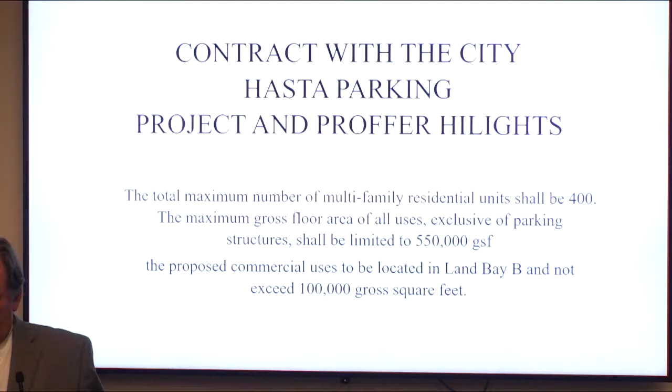Again, this is the contract with the city. We have, in our proposal, 400 apartments, mid to high rise, and a total of 550,000 square feet, which would include a commercial building in what we call the third phase, which is next to Manassas Drive.

As a part of this application, we're going to rebuild the streetscape along Manassas Drive all the way to the railroad. It's going to parallel in design what you have on the other side. It's the streetscape the city has elected to have, and we're going to do that. We're going to take all the power underground, take down old light poles and put in new ones that conform with your design schemes along Manassas Drive. We're going down to the railroad, but that's as far as we can go—that's all the property we have.

We're also going to rebuild a portion of Connor Drive. Currently it's substandard—not a conforming design to VDOT standards. We're going to build a half section of it on our side as a fully conforming VDOT design with sidewalk, et cetera.

We're going to rebuild the... what's the name of the street, Jeremy? No, rebuild Broad Alley—thank you. I knew I brought you for a reason. Broad Alley, I know it's being changed by name to Liberty or something.

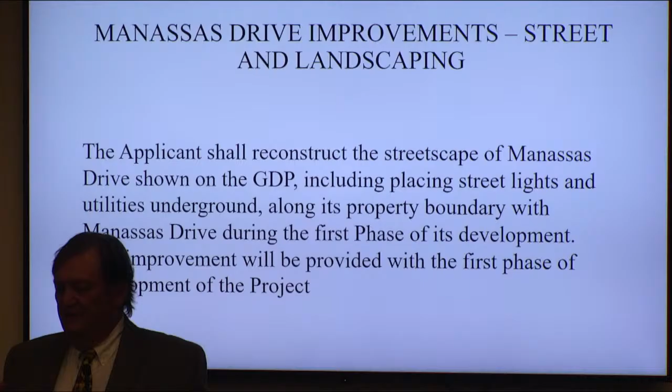So we're going to rebuild that so it's a fully functional two-directional drive into our site, and can spread out ultimately to Connor Drive to Euclid. The redesign of that will require a reconfiguration of the intersection with Manassas Drive. It's currently well below standard, and we're going to try to make it way more predictable and safer, hopefully.

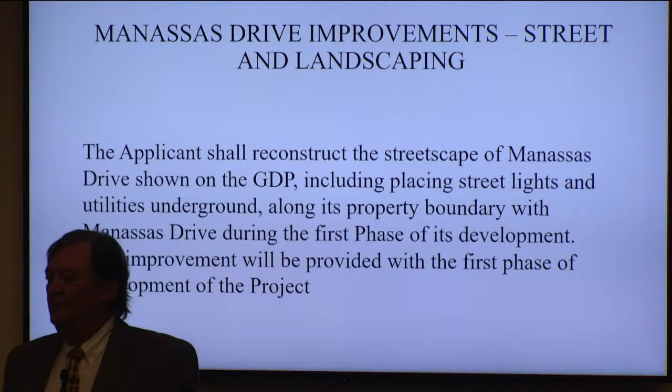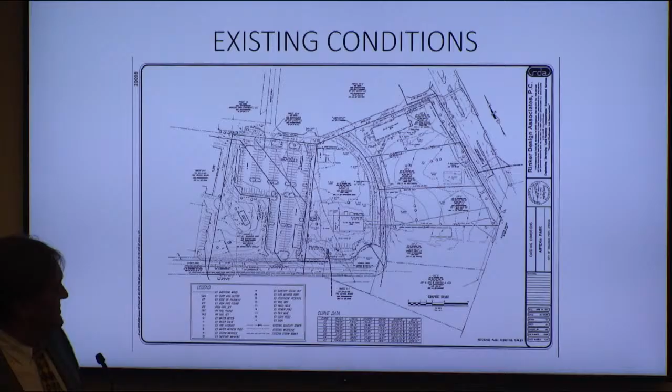We have submitted a generalized development plan. Let me point over here. The existing property has been industrial here, and here's that parking lot we're talking about. There's an old historical—semi-historical—house that's still there right here, and you'll see this come into play with some of our sketches.

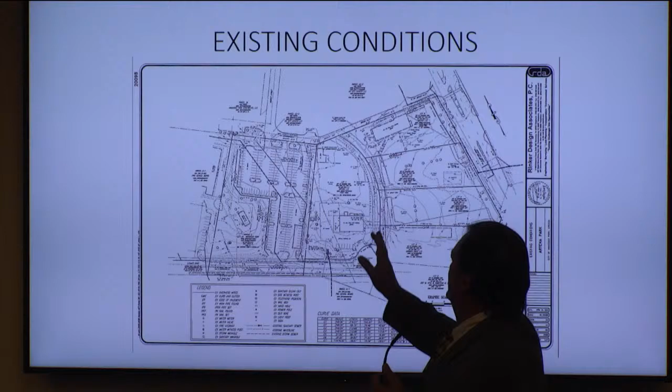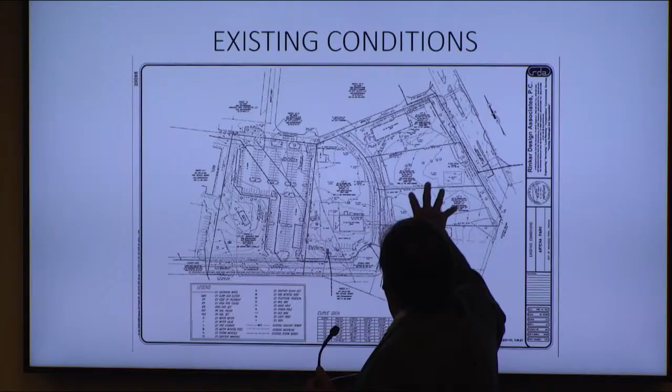Currently, Connor Drive comes here, and there's an easement that runs through here. It doesn't do anything, there's no road, it's just a driveway. So there are industrial buildings that are all going to be removed, obviously, as a part of this project.

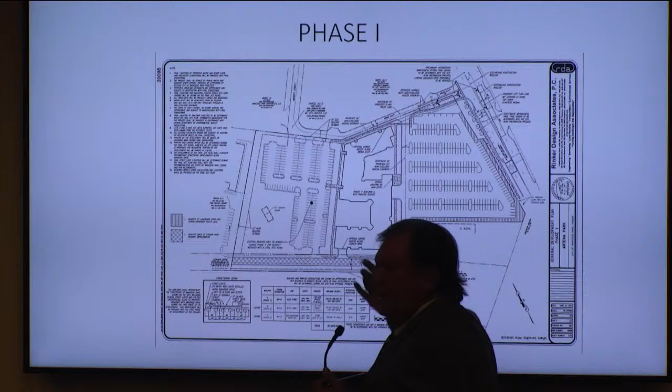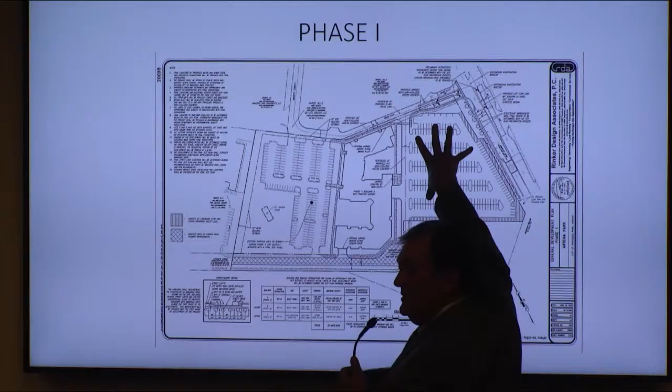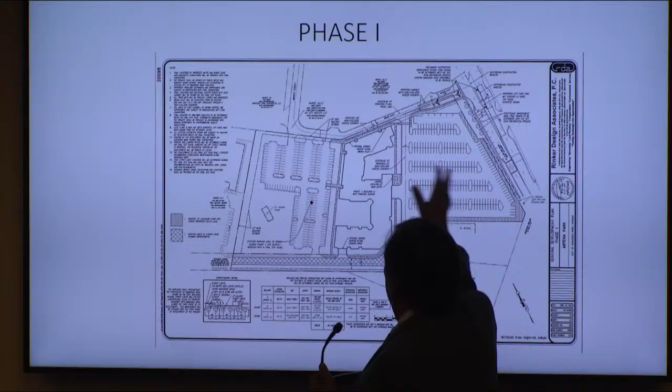This is what we foresee as being our first phase of development. It would be somewhere between 200 and 240 apartment units here, with some structured parking underneath. It's not a full podium building, and you'll see some illustratives that show you a little better. This is where the 150 spaces would go under the deal with the city for them. It's essentially a malleable definition of where these parking spaces will be, because as we develop the sites we're going to have to do some swapping, but they will always have 150 next to them. That's why the parking structure may come into play.

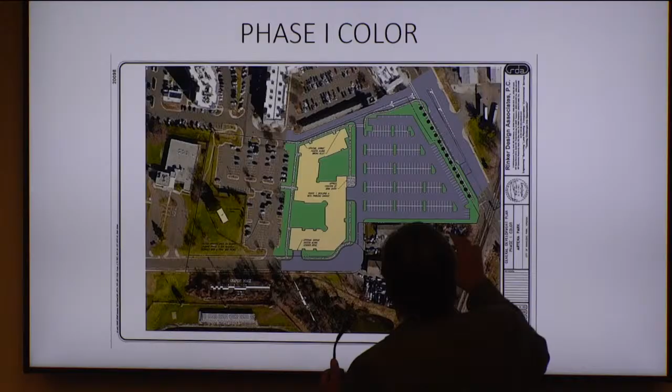This is, again, a little color—shows some of the perimeter with Manassas Drive. We've been asked to treat the area next to these ugly industrial uses. We are going to put a heavy landscaped area in there and try to dissimulate the appearance of those uses. We don't like them either—we don't want an 8-story tenant having to look down on that stuff.

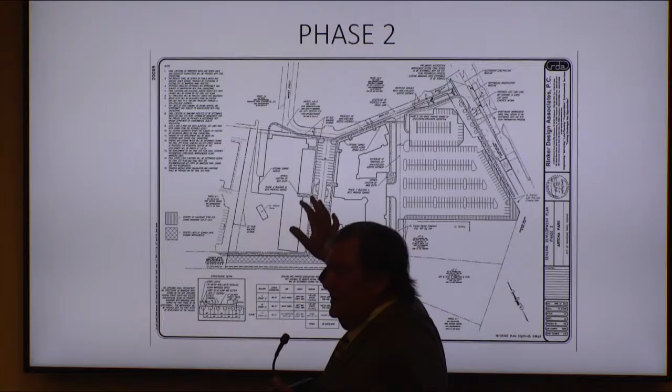This is the project with phase 2. Again, this is a generalized development plan—it's not in final form yet. The buildings have had some design elements completed, but we're reserving the right to do some tweaking. Both of these buildings could have 200 units each, both fully parked with structure parking underneath.

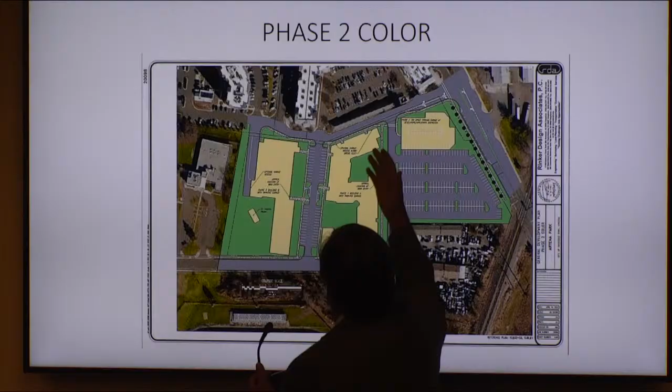The prettier picture is coming up. Okay, this shows you the two phases with a parking structure potentially there. It's our option to provide it—if we build enough structure parking under the buildings, it may not be necessary to build the parking structure here. It's all, obviously, going to be an evolution of site planning.

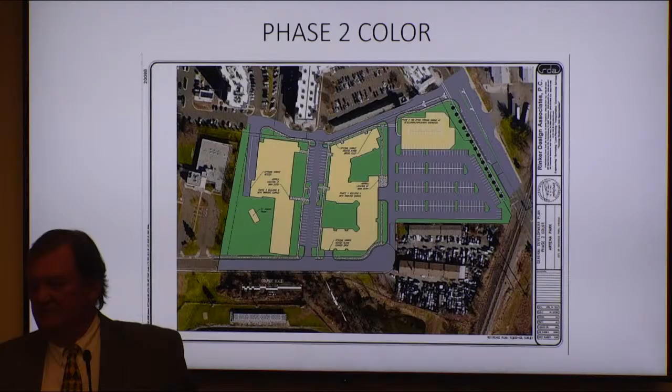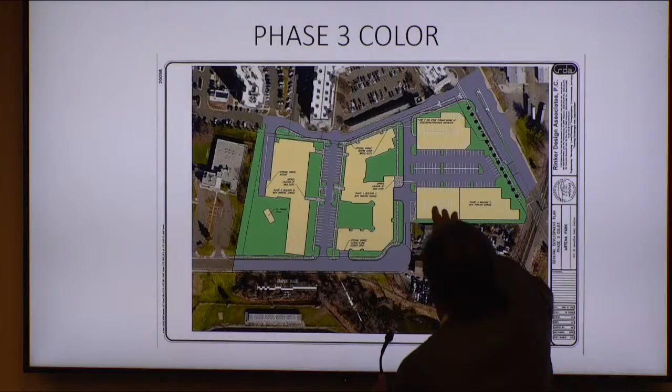Okay, this shows you the final stage, which would include some likely structure parking under a commercial building in this phase. So we would have surface parking feeding the commercial building, with some structure parking in case we go up with it to 4 stories or so. It hasn't been designed yet.

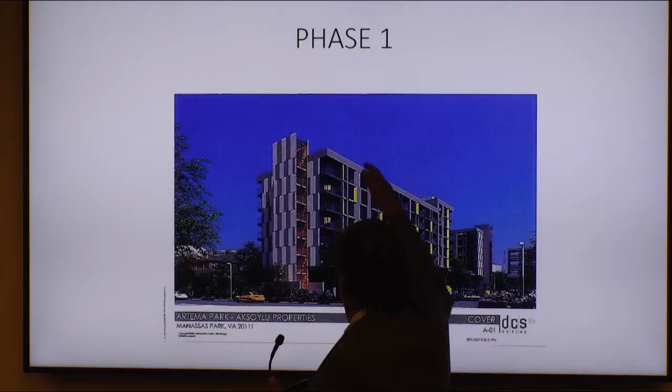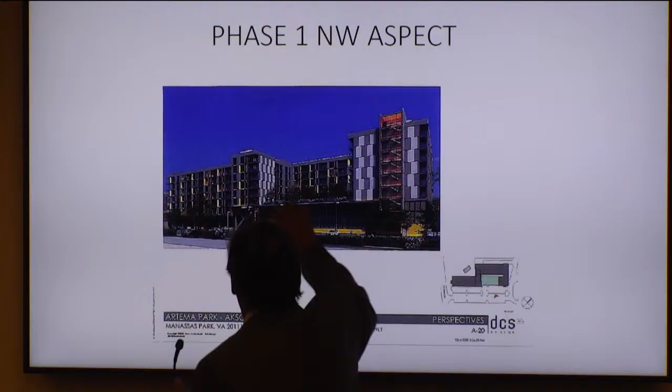This is phase 1. Again, this is showing a 7-story building with an entry notch here, and this back area is structured parking as currently designed. This gives you a view of the same building from the northwest. Once again, this whole area is designed to be structured parking, and most of it enters off of Connor in the current design.

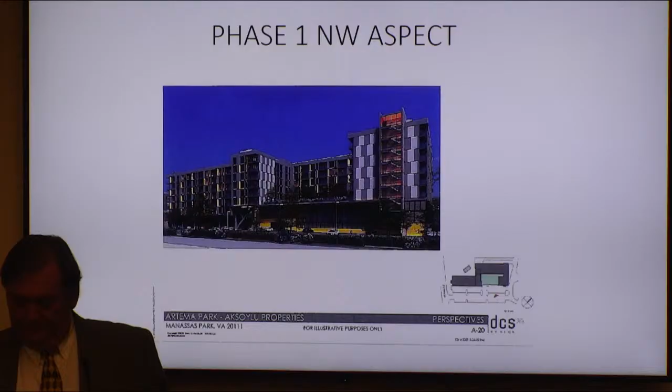This is phase 2, and this concept involves the old house acting maybe as a clubhouse or pool house for the pool that would be notched next to the building. Connor Drive is right here.

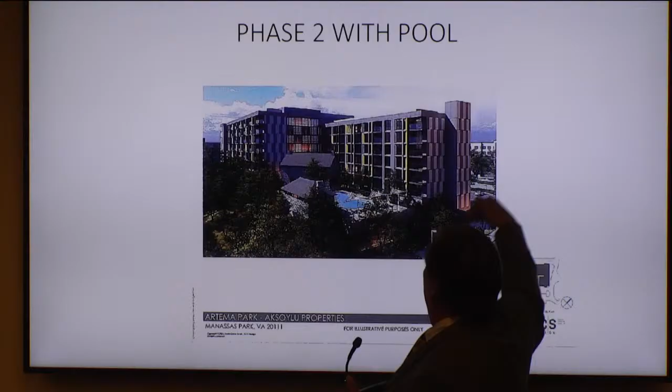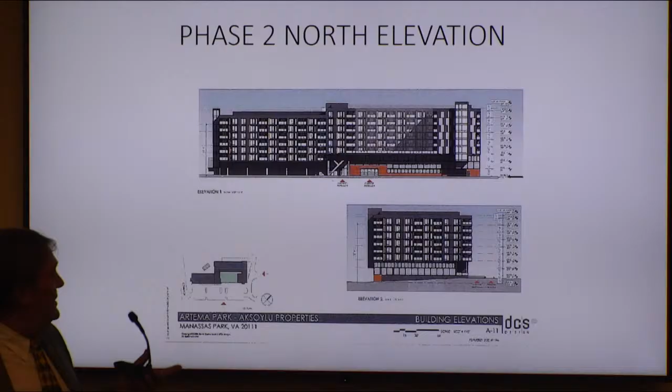This is an elevation from the north side of that same building, and you can see there's an element of structure parking that comes in here as well as here.

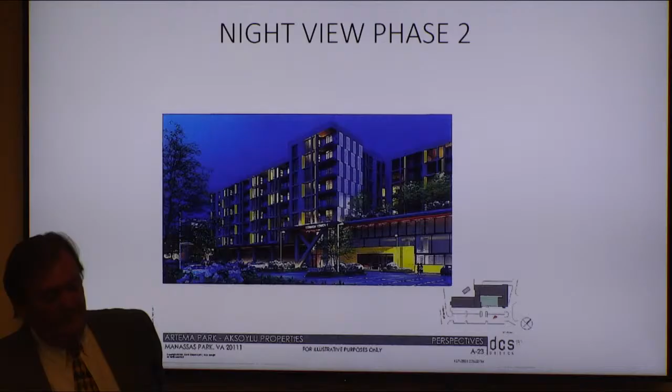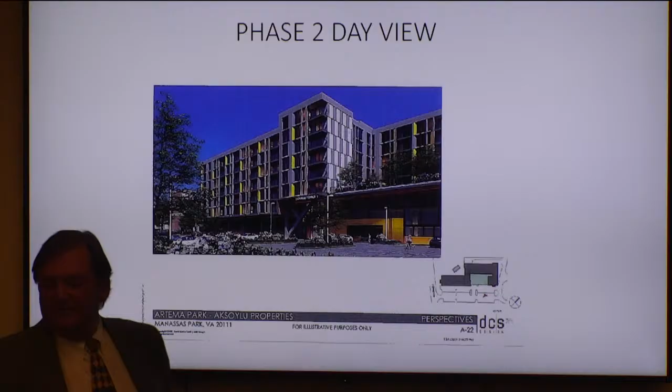Some pretty night views — no use wasting the architect's work. Again, same thing, looking at it from the north. This is looking at it from Connor Drive, from the ugly uses.

And an elevation of phase 2 that shows the existing house, Connor House, and how that would work out in terms of elevations, et cetera. There's a lot of vertical going on over there.

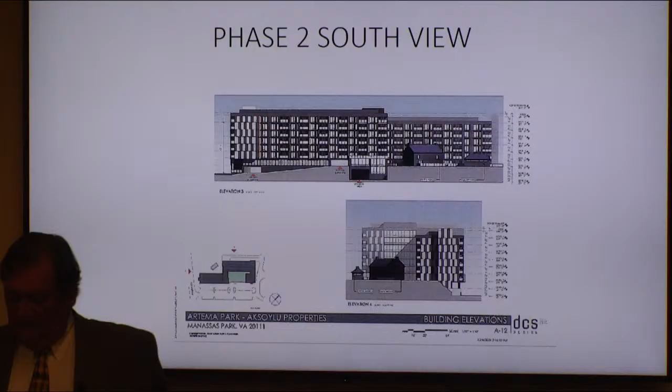We've asked for some modifications, and basically they allow us to be efficient in our site planning. We don't want to have to deal with any minimum lot sizes, not that we would have any small lots. Lot widths and setbacks are in accordance with the ordinances.

Lot coverage not exceeding 90%. We're going to be well below that. For the minimum height for all structures, my engineer noted we have a typo here — it's actually 20 feet what we're looking for, because that commercial building might only be 20 feet. And then a reduction in parking for the residential uses to 1.3 per unit.

Now, these buildings will have all facilities regarding biking and trailing and all that kind of stuff. They're going to have all the parking inside the buildings. That's fully committed, and we really want it.

Our building next door, as you know, is an existing building. That one was our test for parking efficiency in that area, and we had results from 1.28 per unit to 1.12 per unit, depending on days. So we said, okay, we'll go with 1.3, and we'll be fully parked, well parked.

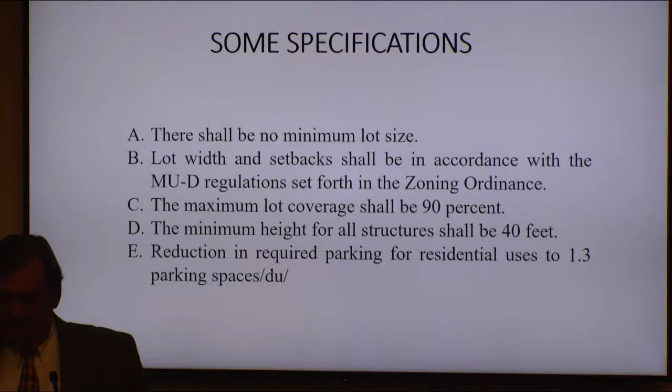That's it. That's my presentation, and I'm happy to answer any questions.

Commissioners, have any questions? Commissioner Mensing: Will the Connor House be accessible to the public, or will it just be for the residents?

Yes. Right now, what we're expecting is we're going to have to totally refurbish that Connor House to accomplish occupancy in it. It's going to be quite a job, a seven-figure kind of job. So how we reconfigure it, for sure it's going to be habitable, and to the extent that management desires to have it available on occasion for weddings and that kind of stuff, it'll be strongly considered, because we're not going to spend $1 million refurbishing that thing without having a reasonable return on that investment.

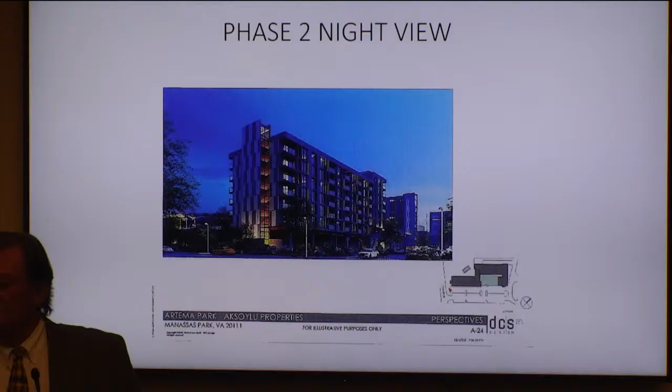Okay, thank you. Just to add, if it's the will of the governing body, we can keep some of the historical sign information on the public right-of-way pieces, just to highlight so people can at least see that and know what that structure is — the stones coming from the city, and that it's the oldest structure in the city.

Yeah, that would be great if it could just be viewed. It doesn't need to be entered. Exactly, of course. Thank you.

Commissioner Collier? Maybe not? I can ask questions if you want to. No, you're okay? I'm going to do it. It's just that — your microphone, I'm sorry.

I have really mixed feelings on the use of the Connor House. That is a Civil War historical building, not to be used as a pool house. I'm sorry, people, I'm going to speak how I feel here tonight. That is a historical building. It's not to be desecrated in any way.

If I may — let me finish, please, because once I get started, it's hard to stop. That building has so much history. And if you go in there, your client — not you personally, it's not directed at you, sir.

If you go inside that building and refurbish it to modern day, I have a hard time with that. It needs to be kept as it is. If you're going to spend that $1 million, bring it back to its natural state completely.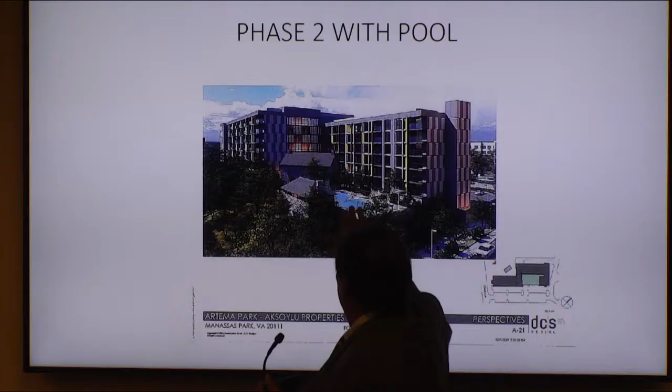If I may, to try to perhaps make you feel better about this. This design plan shows a pool house with a pool and the Connor House behind it, freestanding. The biggest issue we have with the Connor House, aside from habitability, from a design standpoint, is we have to put fire lanes around it, and that really constrains how we develop our site. So we're still working it. I know Mr. Aksoylu, who is our tenant, is in favor of keeping it. So you got that anyway.

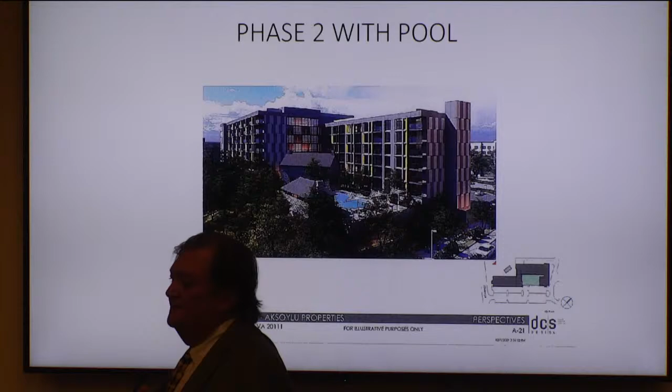I don't know. Thank you. You're welcome.

If I may, at this time, we received a written email with 3 comments in it. I understand that you were provided a copy of that. I'd just like to make sure it gets on the record and then afford you an opportunity to speak to comment number 3, if you wouldn't mind. This is from a Mr. Mark Scheffler, Manassas area resident, dated May 2nd, 2023.

Manassas Park Planning Commission, please consider the following comments to rezoning RZ number 22-03, Downtown Development Phase 4, Artena Park. Number 1, very supportive of the density near the VRE station downtown area. Number 2, very supportive of what appears to be the preservation of the Connor House. Number 3, one element missing from the project is what appears to be a lack of ground floor apartments or townhouses with private entrances opening directly to the street. The design appears to include a lot of blank space and parking podiums on the ground level, which does not promote a sense of community outside of the buildings.

The design should include the outward-facing concept that supports people walking past doors, stoops, porches, and more importantly, people. This makes the area safer by providing more eyes on the street. Ground floor units could be separate from the main building design and could provide other rental housing types. Please consider this feedback for a more urban concept and not a semi-urban design. And then he has a link to an article below that.

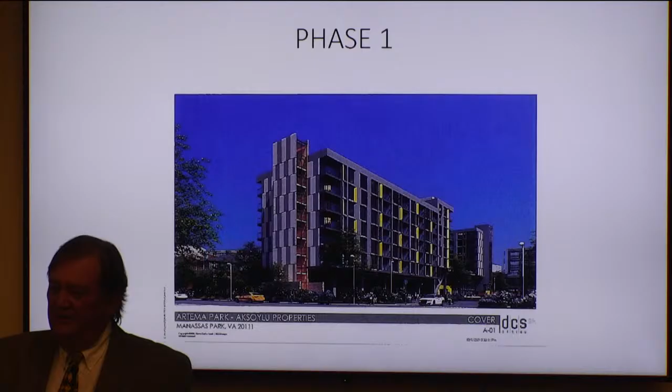One other item, in the proffer, clarifying that the existing NOVEC streetlights will be removed and all existing utilities will be placed underground. I understood you to say underground. Yes, and we showed all that in our GDP. Okay, it's all depicted and noted. Great, thank you. Other questions from commissioners? Okay, thank you very much. Thank you, Mr. Chairman.

Administrator Berry? Oh, don't let me walk away with this. Do you want it? Have luck with this. Great, okay. Oh, there we go, okay. All right, thank you, Chairman.

I am Michelle Berry, the zoning administrator for the City of Manassas Park. I'd just like to give you a brief presentation. Some of these images will be repetitive, so I'll go through those pretty quickly.

Which one did you use to move the arrow? What do you use now? Oh, is it? Have to close one. Probably close that one. That one. Oh, perfect. Okay, thank you, Laszlo.

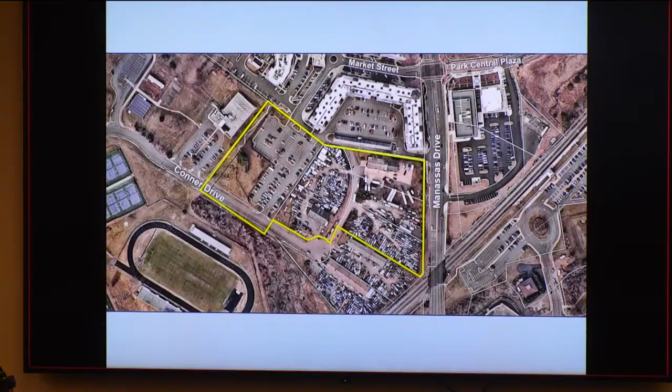Okay, let's move on. Here's the location of the property. I know the applicant described it, but here's just an aerial overview. It is bound by Manassas Drive and Conner Drive to the south. There are a lot of industrial properties currently in use, so I believe staff and the rest of the city are happy to see that use change. We are excited about that part of the application.

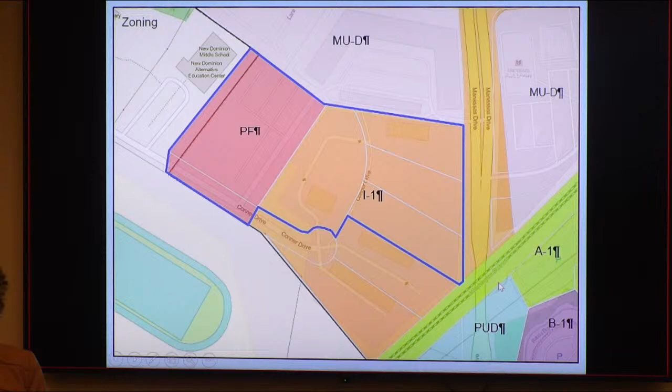Just from zoning, you can see that the property is zoned PF and I-1. The PF is the city-owned parcel that was discussed earlier, and everything else is industrial.

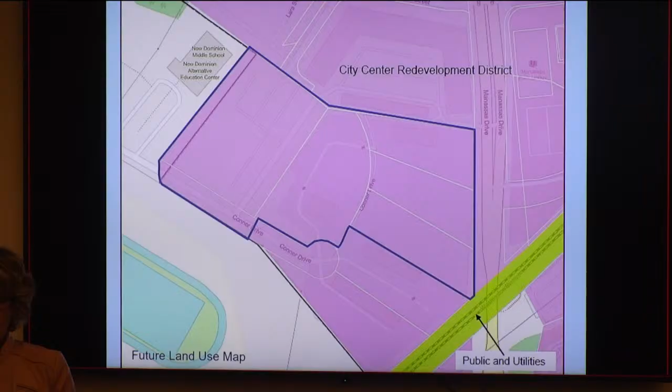So Phase One, as Mr. Montenegro described, is going to be the first apartment building, which will be in the middle of the site, along with 150 parking spaces. They are providing the requisite City Center Redevelopment streetscape. You'll see the parallel parking, the street trees, and can't see it too clearly, but there are light posts in between the trees.

I just wanted to focus on this area of the plan to show that they are doing improvements along Manassas Drive, making a left turn lane, and then converting Broad Alley into a two-way direction. It currently is one-way, only accessing Manassas Drive. So it will be through traffic there, with a dedicated right and left.

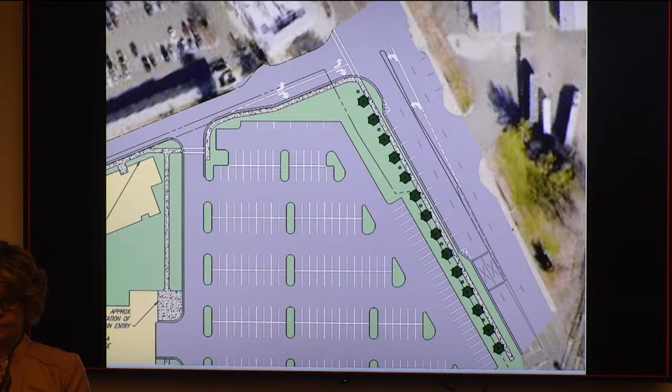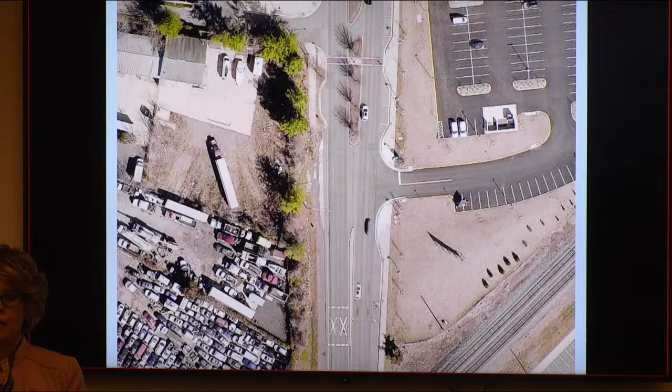So here's just an overview of the existing condition. I wanted to show this because you can see there is an ability to turn left here at Naylor Drive. What this shows is this median will prevent that from happening. I know we had some concerns about these left turn movements — if you've actually done them yourself, there can be a little bit of a wait. So I think this will assist with some traffic movement on Manassas Drive. And it just shows the layout of what's going to come.

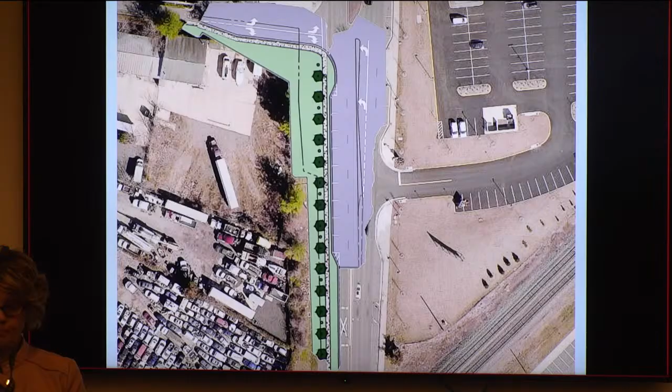Here's Phase Two, and this is certainly repetitive. There's the second building. I did want to highlight that the applicant is providing a lot of pedestrian connections along Broad Alley on the south. The first apartment building has sidewalks on both sides, as well as the second apartment building, which will have frontage there. There is an existing crosswalk on both sides of Conner Drive, so that literally creates a pedestrian connection now from Manassas Drive to Conner as part of this development. Staff are really happy to see that type of connection in our downtown.

Phase 3 will include the commercial building. This proposed parking garage, I forgot to mention, that is to happen with phase 2. But this will be the full development, commercial in the front and the residential in the rear.

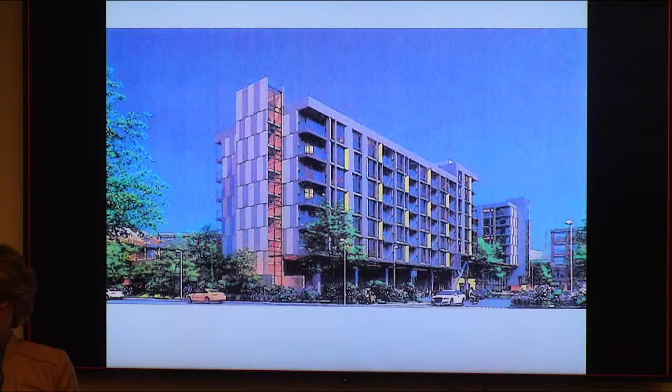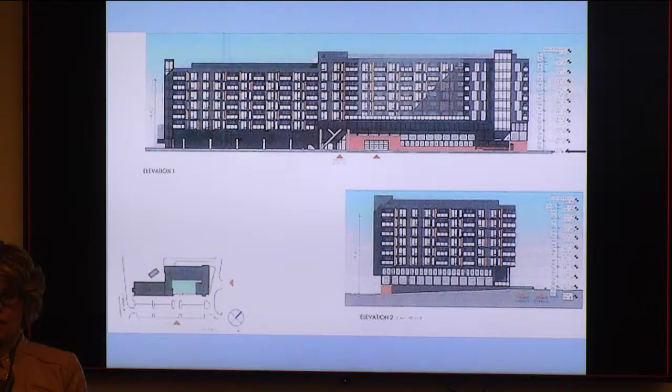You were already shown these elevations, so I'll just go through them real quickly. This is just showing the sides of the building, and I believe this is the side off of Broad Alley or Liberty Street, and this is the frontage on that private street that will front that building.

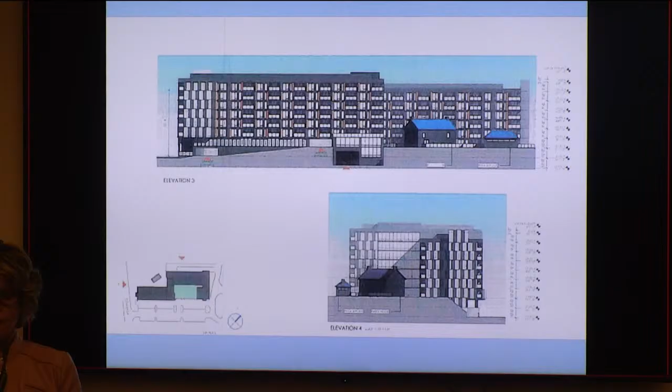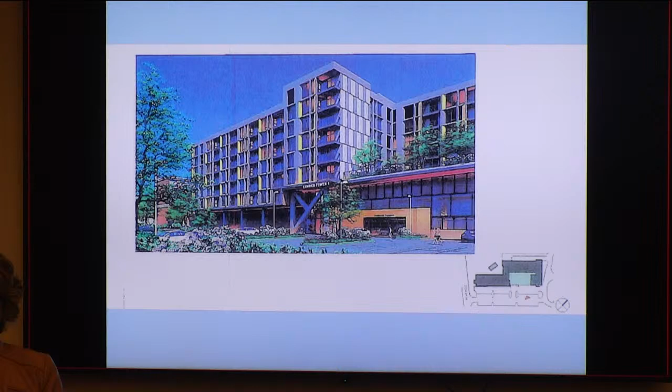We've seen this before. There's the Conner House and another, that's the rear elevation of building 2 of phase 2. We've seen this, the pool and the Conner House. This is looking at it from the front. And this is the main entrance to the parking garage, and here we have the principal entrance for the apartment building. And then this is just a longer view of the frontage of the apartment building for phase 2.

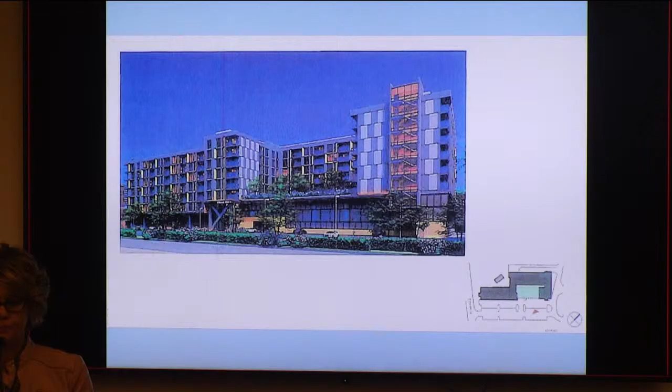As mentioned by the applicant, they are requesting several waivers. Those are permitted under section 31-33.2 of the zoning ordinance. Here's the list. I'm not going to read everything out to you, but height of buildings, parking, buffers, landscaping, and then the residential percentage, which is applicable here to this application.

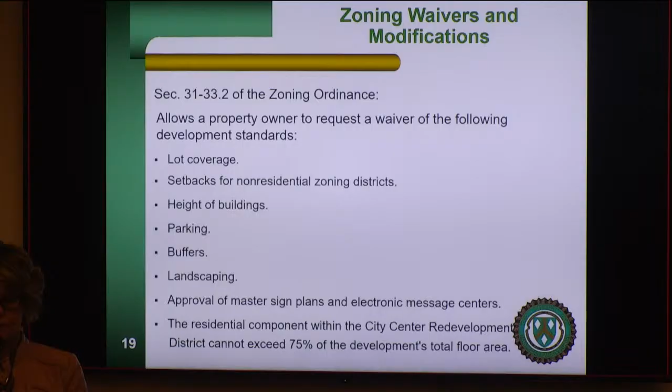Just to go over the waivers, there is an increase in the residential percentage to 100% from 75%. Now, in total, it will be about 80% residential and 20% commercial, but the applicant wanted to make sure that with the phasing, it's going to be 100% residential in Phase 1 and Phase 2, and still wanted to be compliant with the waiver. So it was requested to be increased to 100%, but if all three phases are developed, then that would certainly be reduced down to 80% residential.

They are increasing the impervious coverage to 90% from 75%. That is the figure that we received for the application. I'm happy to hear it's probably less than that. So we are still kind of looking for some amenities and landscaping plans that we can see to ensure that they're offsetting the impervious surface coverage with at least some type of outside amenities for the residents.

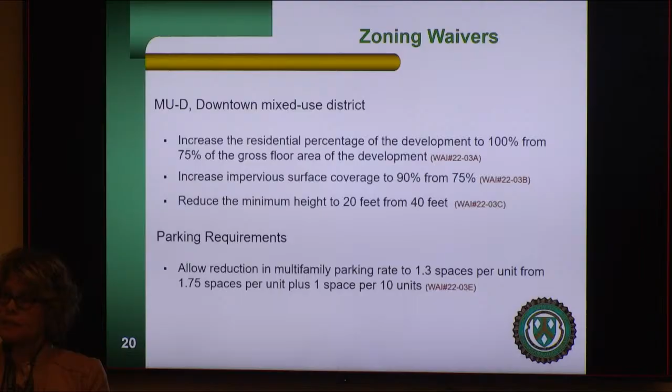Reducing the minimum height to 20 feet, that could be applied to the proposed parking structure in the front as well as the commercial building. And as mentioned, they are doing a reduction to the parking rate, and Mr. Montenegro mentioned the parking study that they did, which is why they came to the proposed 1.3 spaces.

Parking lot landscaping, these are typical waivers. This was exactly requested with the Phase 3 downtown. These are landscaping islands and ensuring there's a green space within the parking lots. I'm sure you're aware that this is more of a suburban model, so we typically waive this to get a little more density and compactness to the development instead of having all these green areas.

And then lastly is the screening. Typically this is mentioned for screening along the southern property boundary. I would note in the zoning ordinance, if the plans call for the abutting property to be in the same future land use district, then the actual screening isn't required. And I believe the applicant made a good point where, since the buildings are going to be so tall, the residents will probably see the industrial properties anyway. But we still would like to see what type of landscaping they're doing, as well as we are concerned about visual screening from Manassas Drive.

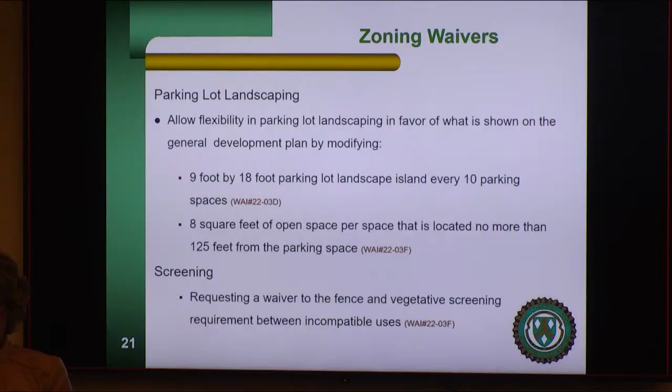The public facility manuals all deal with private streets. First is modifying the street width to a minimum of 24, exceeding 700 vehicles per day, revising the sidewalk requirements to one side of the street, and removing the prohibition on residential frontage. Again, these were similar to Phase 3, where we did modify all of these, with the exception of the first one, where we did request that they be reduced to no less than 26 feet. And we're standing by that same recommendation for this application.

So just to evaluate this application based on the comprehensive plan, we looked at the City Center Redevelopment District, as well as the Transportation Chapter of the comprehensive plan, and some points about what we're looking for and what the guidance is.

We're looking for a mixed use of commercial, retail, and residential. We want consolidation of parcels for an integrated development, and the applicant is consolidating 5 parcels, so that certainly meets the intent of the comprehensive plan in that regard.

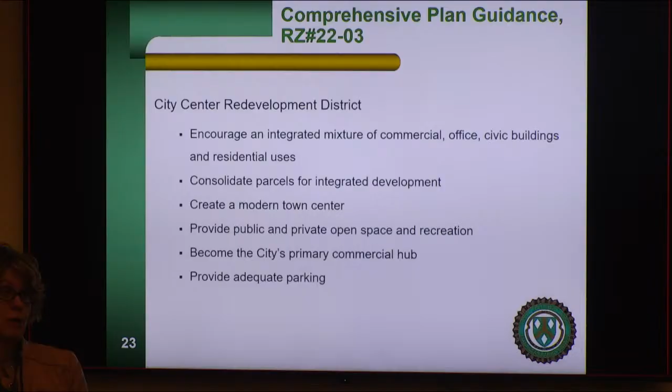It's also looking for public and private open space and recreation, and of course we want commercial activity with pedestrians in the downtown at various times of day, including nighttime, and also providing adequate parking, which the applicant touched upon earlier.

For transportation, we have sections in the transportation chapter that talk about new roadway connections, especially between Conner Drive and Manassas Drive, and pedestrian connectivity, which this application does a very good job at within the downtown, creating new sidewalk connections.

The CIP is actually a component of the comprehensive plan with their capital improvement program. We have a future roadway development called Conner Drive Extension South, and that is why we are requesting design to VDOT urban design standards. We intend to get another connection directly from Conner to Manassas Drive, south of the tracks. So we are seeking design of their portion of Conner Drive so we can use that for the future design of that ultimate connection.

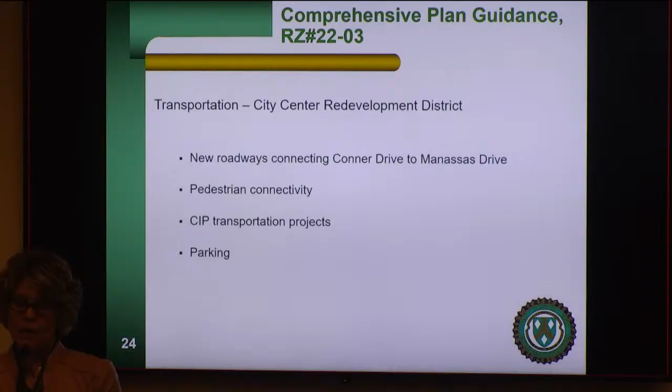Parking has always been a concern throughout the city, and certainly this application is no different. They are trying to juggle some parking availability issues we have downtown, as well as addressing parking for their site in general.

Here is the Conner Drive Extension South CIP project page. Just to remind you, we went over this a few months ago, and we're trying to get additional connections into the downtown. We see this as a critical opportunity and roadway connection to facilitate traffic throughout the downtown and within the city.

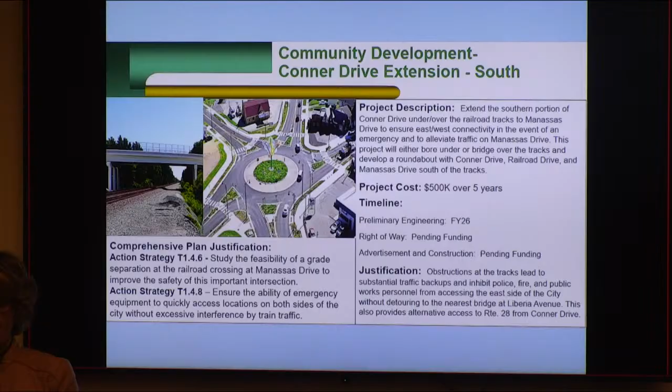They are showing some open space and recreation. We would like the applicant to at least provide a little more detail on that, and I'll go over that in my recommendations. They are providing several transportation improvements, improving the intersection at Broad Alley and Manassas Drive, sidewalk connections throughout the development, and dedicating right-of-way for Conner Drive, because some of it's not public right-of-way, it's city-owned property, so that dedication will assist the city.

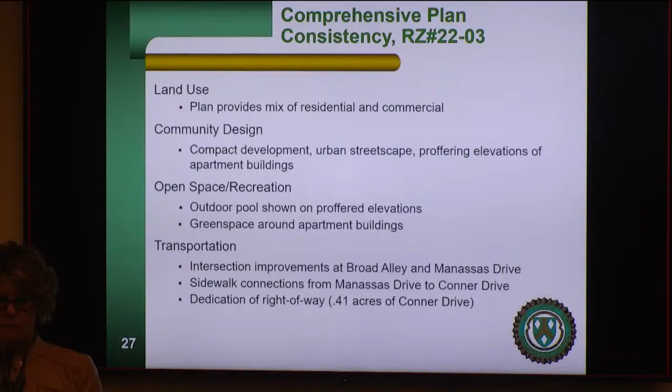As part of this application, we are recommending approval, and I believe the applicant has committed to these issues, but at the time of the staff report, we would like them to provide a design of the Conner Drive frontage using VDOT urban street standards and submit that at the time of the Phase 2 site plan submission, and remove the existing crosswalk on Manassas Drive immediately south of Broad Alley.

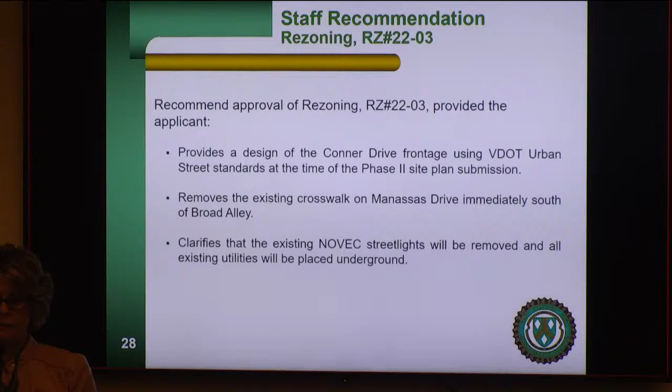I believe they have committed to doing that. We'd also like them to clarify that the existing NOVEC streetlights would be removed and utilities placed underground. The proffer language was a little unclear to me, but I wanted to make sure that was what we were getting, because the streetscape and that street view is very important, and we'd like that visual clutter removed.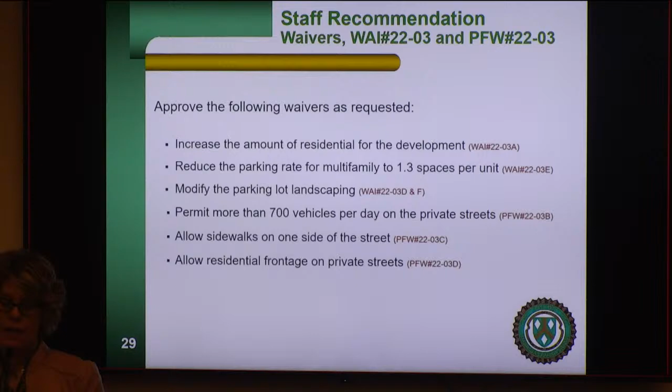For the waivers, we are requesting and recommending approval of the following: the increase in the amount of residential, reducing parking to 1.3 spaces, modifying the parking lot landscaping as shown on the general development plan, and we're comfortable with 700 vehicles per day on private streets, sidewalks on one side, and allowing residential frontage on the private streets.

For the waivers where we would like more clarification or commitment from the applicant: we did see elevations, but not for each of the structures, so we are asking staff to make sure architectural elevations are provided for all buildings, subject to review and approval of the zoning administrator. The same goes for the open space and recreation plan.

Given there is limited open space, although we don't know the extent since it's probably not going to be 90%, we still would like to see what the applicant is proposing in terms of recreation. You saw a pool on one of the renderings. We just want to make sure each building has a pool, and that there are dedicated areas for dog walking, pet waste stations, and maybe some benches, to make this friendlier in terms of walkability and create a nice residential area for residents in the apartment buildings.

Similar to that, the landscaping and screening, we are concerned about that. The applicant did point out in that corner next to Manassas Drive and the screening of the properties to the south, but we would like to see a detailed plan on how that's going to happen.

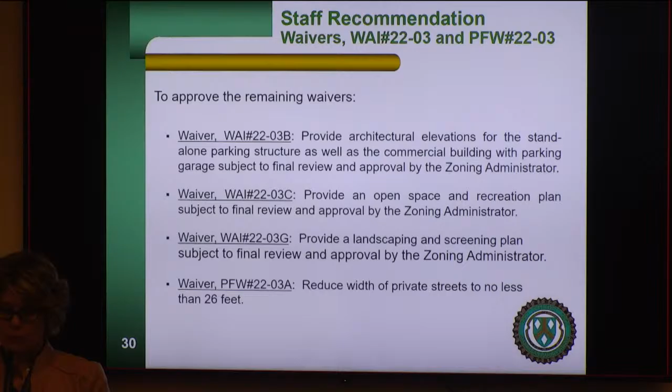And then lastly, as I previously mentioned, they did request a reduction in the private street to 24 feet. I know our fire marshal wants the width to be no less than 26 feet, so we are requesting that the waiver be modified to 26 feet as opposed to 24. And I'll just leave with the overview of all three phases, and I'd be happy to answer any questions.

Questions from commissioners for Administrator Barry? Don't see any. Thank you.

Thank you, I have a question real quick before she leaves. This is Dean again. Go ahead, Dean. So up there, Mickey, you say that Broad Street, which is going to be called Liberty Street later, is two-way, but it only shows one way on this rendering. I think, I mean, I don't. It does. I may be wrong, but I just want to make sure that that's a two-way reference there.

Yes, it is. There's one coming in, there's the turn lane off Manassas Drive, and then there's a right turn lane and a left turn lane exiting Broad Street. Yeah, I see that, I just didn't see any arrows going in there, but that's confirmed, right? That's my only question. That wasn't shown on the rendering, but you can kind of deduce that from the left turn lane shown. I got you, I just want to make sure. Yep, no, very good, thanks.

Administrator Barry, Commissioner Collier has a question. I do have a question. On the parking in Phase 1, the 150 spaces, and then possibly changing in Phase 2 to a parking garage, it kind of doesn't make any sense to me to put it off. If you're going to do it, would it be more cost-effective to do it in Phase 1 instead of waiting? I mean, I don't know what the time frame would be, but why would you not go ahead and do it instead of waiting?

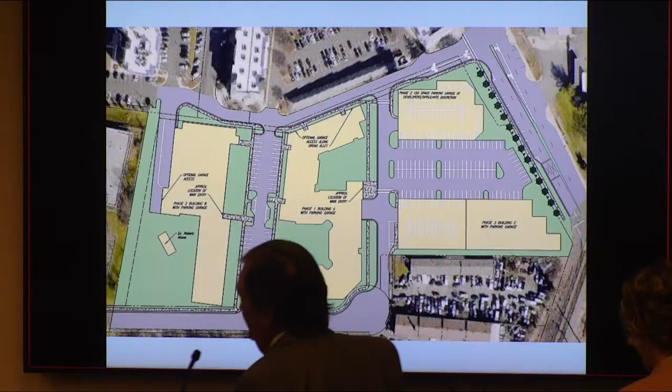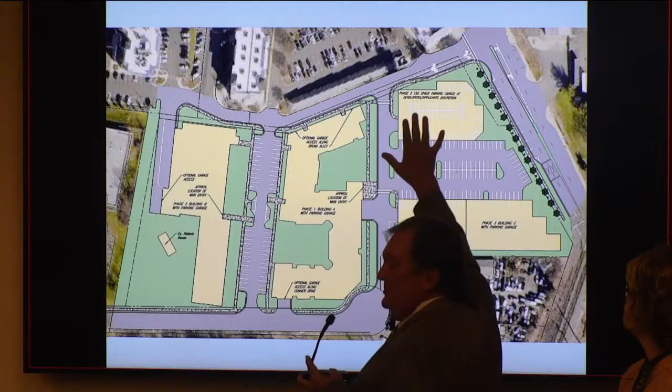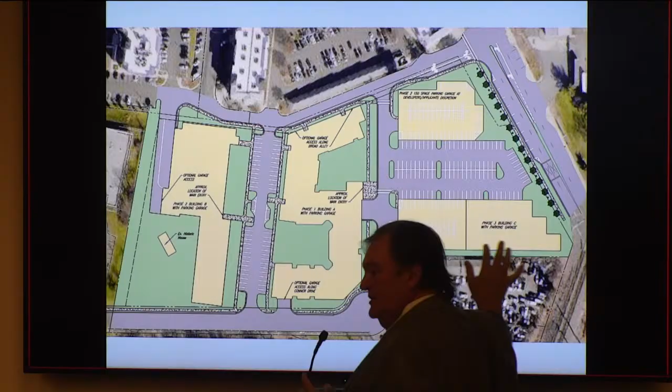Sorry, thank you. We're trying to maximize our flexibility in phasing here, and the one commitment we did make is to provide 150 spaces up here. The reason we wouldn't put a parking structure is it costs about $3 million to do that initially, and there's actually no need to do that if we park these two buildings, okay? So if we put structures underneath, we can put the 150 here on surface until we build the commercial, and then we have to build that, okay?

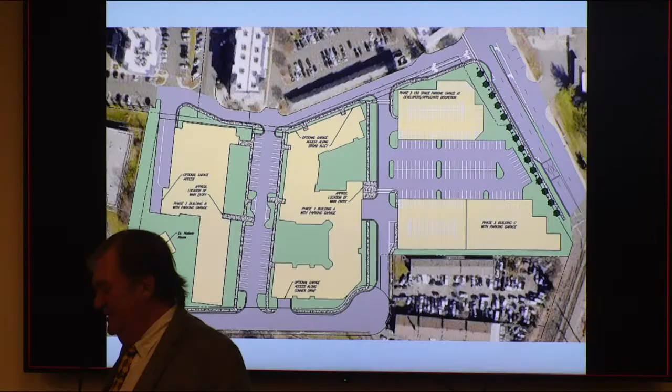So it's a matter of dollars and phasing. Well there again, if you wait, would it be not more expensive if you waited? Not really, no, because we'd be spending money on that, like $3 million in that garage that we don't have to, and the debt service on $3 million over time would exceed the additional cost of construction at a later date. So we've done this analysis extensively, it doesn't make any sense to provide it up front. Okay, thank you. You're welcome.

I don't see any other questions there. Thank you, okay, thank you. And I don't see any members of the public present either, just want to say that for the record. So if we have no other questions from commissioners, then I'll go ahead and, is the applicant satisfied? No other comments?

I'm happy to answer any questions, Mr. Chairman. Okay, any other questions for the applicant? No further. Okay, thank you very much, we appreciate you being here this evening.

Then at this time, I will ask for a motion to close public hearing rezoning RZ number 22-03, Downtown Development Phase 4, Artina Park. So moved. Motion, second? Second. All those in favor signify by saying aye. Aye, aye. Opposed? Abstentions? Motion carries unanimously.

I will also ask for a motion at this time to close public hearing waivers, WAI number 22-03A through G, and public facilities manual waivers, PFW number 22-03A through D. Moved. Motion, second? Second, second. All those in favor signify by saying aye. Aye, aye, aye. Opposed? Abstentions? Motion carries unanimously.

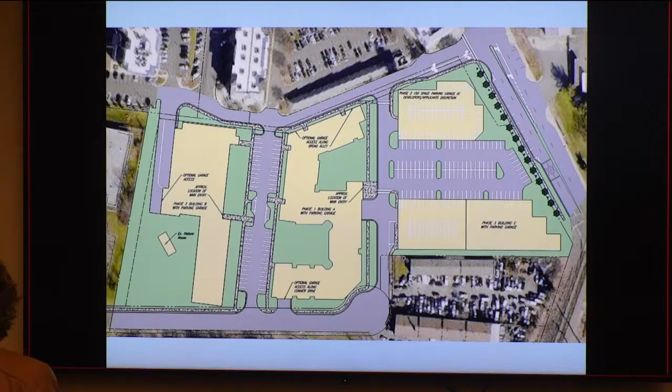Great, thank you. Questions from commissioners on that? I have a question: when will tonight's action go to the city council? Well, I believe it's going to be June, the second meeting in June. I'm not going to be here, and I don't think I'll be able to make the advertisements for the first meeting, so it should be... I don't have a calendar in front of me. June 20th? Yeah.